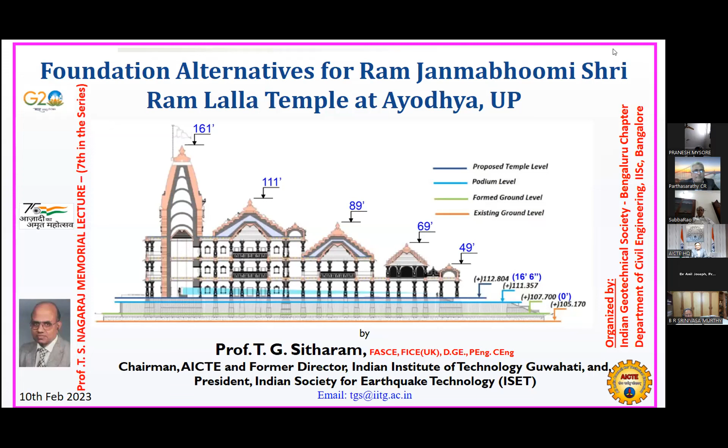I would like to acknowledge the contribution of the 8-member committee. Before I proceed with my talk, you can see many names very relevant and known to all of you. Professor Raju chaired this committee, former director of IIT Delhi, and L&T Geostructure LLP, Larsen & Toubro Limited Construction, was the contractor. CBRI and NGRI is the main agency for geotechnical and geological investigations. IIT Madras also reported on the backfill. Argon Engineers, Consulting Engineers and Architect Ahmedabad was also involved in some of the structural part.

C B Sompura, Temple Architect Ahmedabad, gave the initial concept for the temple of Sri Ram Temple at Ayodhya. Sanjars Geotechnic Private Limited, soil foundation experts from Delhi, carried out the geotechnical investigation in two phases. NGRI and many other institutions in the country have also done studies. This is the composition of the committee.

This is the committee. It had Professor Manu Santanam, Deepta Banerjee, former director of IIT Roorkee, A P Mal from Tata Consulting Engineering, Bhattacharjee from IIT Delhi, myself, Professor Gandhi, also known to all of you, former director of NIT Surat, and Professor Dr. Gopal Krishnan, former CBRI director, when I was chairman of the Research Council of CBRI - he was the director - and Professor V.S. Raju was the chairman. Thanks to all of them for their contribution.

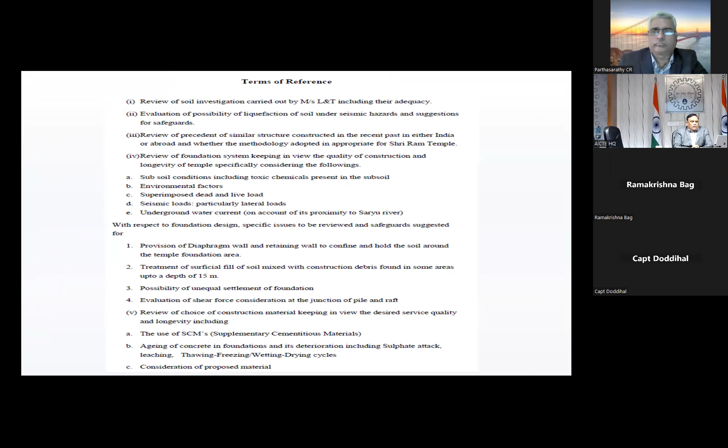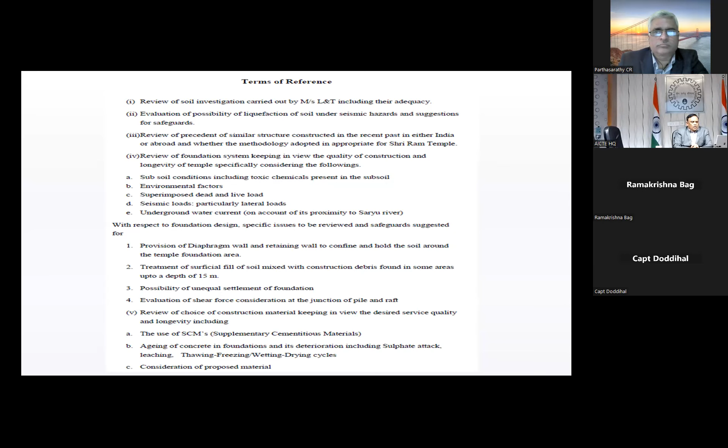The terms of reference for this committee - I will not read it all out, but you can see clearly - were to review the soil investigation carried out by M/s L&T, evaluate the possibility of liquefaction of soil under seismic hazards and suggest safeguards, review precedents of similar structures constructed recently in India or abroad, review foundation systems, subsoil conditions, environmental factors, superimposed dead and live loads, and underground water current, since it's very close to the Sarayu River or Ghaghara River in Ayodhya.

With respect to the foundation, specific questions were asked to the committee: whether there is a need for a diaphragm wall or retaining wall to confine the entire area and hold the soil around the temple foundation; treatment of surficial fill of soil mixed with construction debris found in some areas up to a depth of 15 meters; possibility of unequal settlement of foundations; evaluation of shear force consideration at the junction of the pile and raft; and review of choice of construction material keeping in view desired service quality and longevity, including the use of SCMs (supplementary cementitious materials), aging of concrete, and consideration of proposed material.

From this, it's very clear this was a very comprehensive committee which looked at many things. In my talk, I'm not going to get into all the details, might touch some, but not all. I'm going to only focus on the foundation alternatives, what alternatives were suggested, what was my contribution, and why I was a little different than others in that.

I would like to highlight that when this committee was formed and this terms of reference was given, L&T had already put the big drill rigs for piling. They had drilled 4 piles up to almost 18 to 20 meter depth, 1 meter diameter, without any reinforcement. They tested both vertical and horizontal pile load tests at the site, slightly adjacent, 10-15 meters from the Garbhagriha. This is the background. After that, this committee was formed.

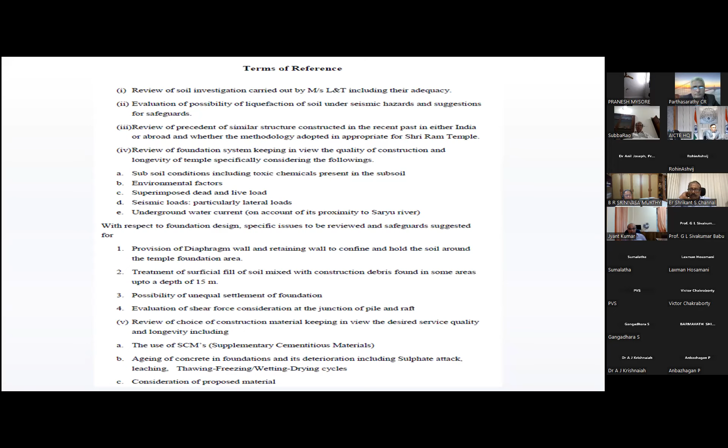So let me give you the project brief now. Next slide please. This is the Sri Ram temple at Sri Ram Janmabhoomi complex at Ayodhya.

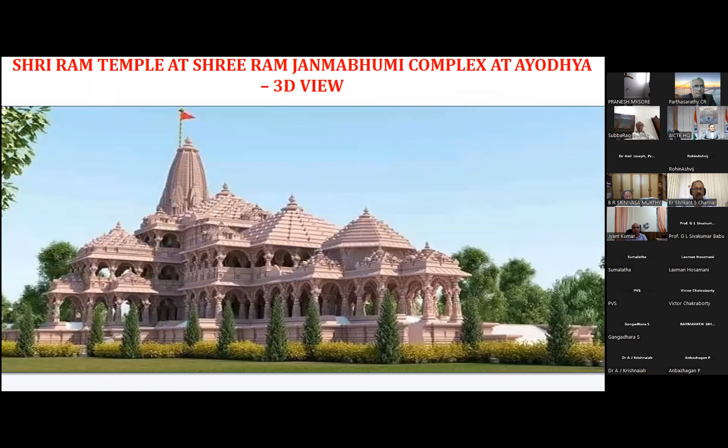It is completely constructed. This is what it looks like, and a 3D view of the same can be visible. This is the 3D view of the temple. I'm only talking about the temple, Ram temple, not the entire complex.

Please understand, this is about 70 acres, 67 acres precisely initially, but today it has even increased to 100 acres of land. So I'm not going to talk about the entire area of how the Ram temple complex will be built. I'm only focusing on the temple foundation. This temple is what you are seeing in the picture.

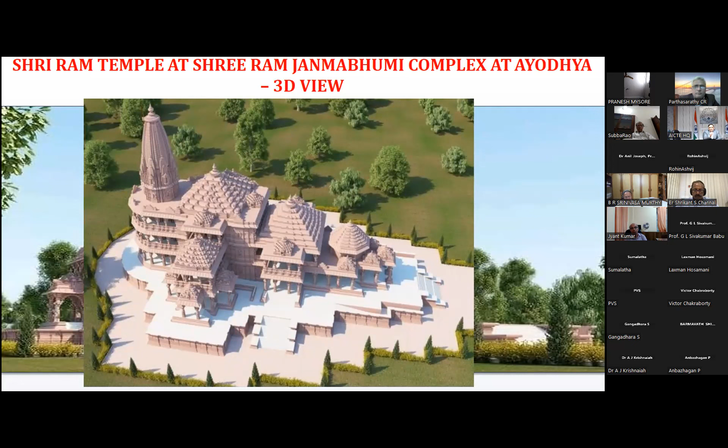So the project location, next slide please. The project location, you can very clearly see, is about 140 kilometers from the city of Lucknow.

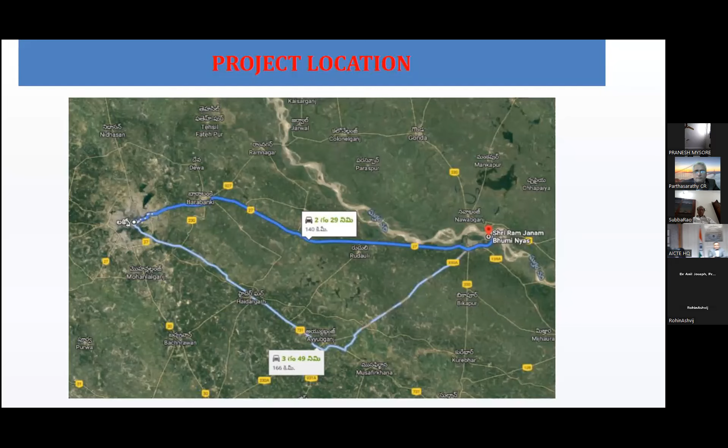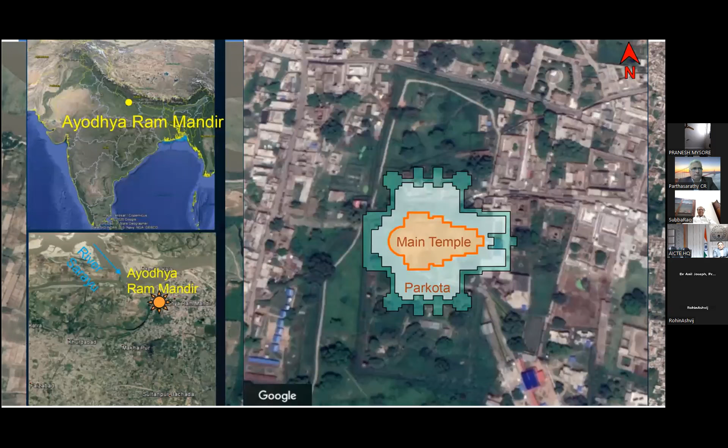Next slide please. This is the location of the main temple. For those who want to see where Ayodhya itself is in the Indian location, you can see it in this picture.

Next slide please. This is what I want you to closely observe, the exact location. If you see the bottom part of the cross section, you can see that square box in green is the temple foundation, the probable foundation of the temple. You can see the cross section along the x-axis, and very clearly the temple is actually on a mound, on a sort of mountain. The next cross section also shows the same thing in the perpendicular direction. So you can clearly see the distance from the river is hardly about a kilometer, but the temple is located on a mound, on a sort of mountain at that location. Even immediately next to the temple foundation, about 15-20 or 30 meters away, the gradient changes drastically, as you can see in this diagram.

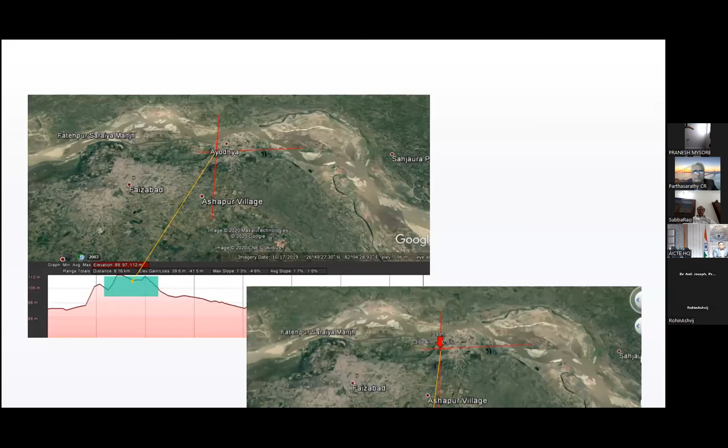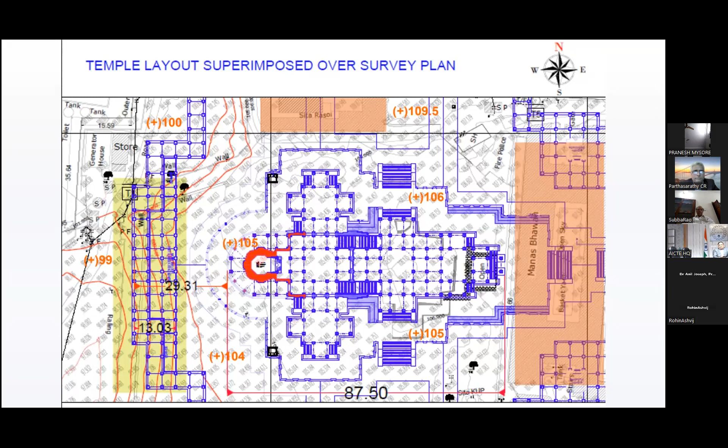Next slide please. You can see the contours here and the temple foundation very clearly marked. I will talk about the temple foundation levels in the next slide too. About 105 is the ground level. On the eastern side and western side, there is almost a 6 meter drop, going to 99 meters. On the other side, it increases by about 4 meters or 3 meters in the northern or northeastern side. And it is fairly flat in the southeastern side.

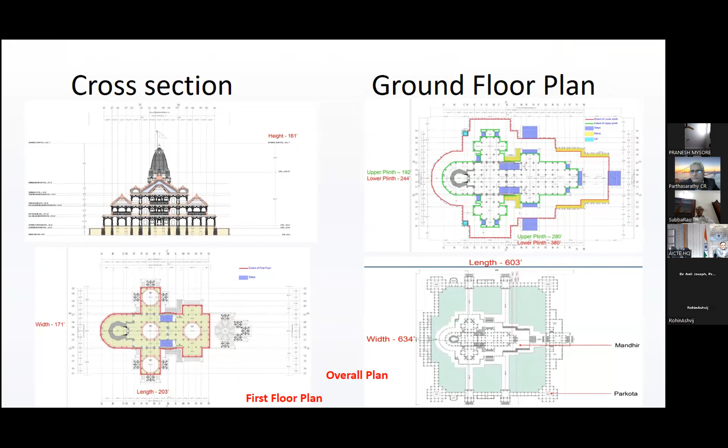So you can see the total width of the temple. It's about 116 meters in length and 74 meters in width. This is the main temple, and the parikrama is outside. The total dimension is 182 meters by 181 meters for the entire temple.

Next slide, please. Now the typical cross section of the temple. You can see the bottom part, and the center where the Garbhagriha is located has a tower 161 feet tall.

Also please note, 105 meters is the ground level, but the made-up level is at the podium level, which we call 111 meters. The proposed temple level is at 112 meters, about 7 meters above the existing ground level. But the formed ground level is something like 107 meters, meaning the temple level is 5 meters above the formed ground level. So there are a lot of steps to climb on both sides as well as the front.

Next slide, please. Before that, go back one slide. So you can also see the 3 levels: 161 feet, 111 feet, 89 feet, 69 feet, 49 feet. The gopuras for different sections of the temple also vary.

I will not get into the structural details, but the total temple design is very important for deciding the type of foundation. The pillar connections have no steel at all used in the temple construction. The pillars, beams, and columns are almost ready-made and simply assembled at the site. You can clearly see copper clamps used for the slab connection and beam connection. For the pillar connections, they are basically grooved into the base parts of the pillars.

Very clearly you can see cross section A and cross section B, with details given here. If some of you are interested, I will share the presentation after my talk so you can take a closer look. Next slide, please.

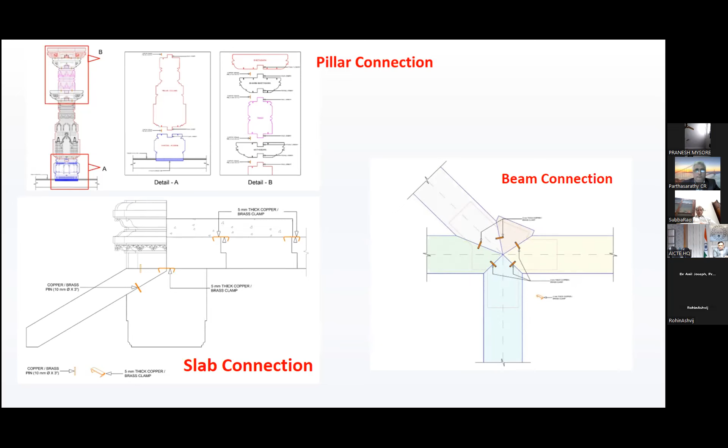The contractor is L&T Geostructure, a unique legal business entity who are experts in building foundations by focusing, capturing, and building business in the ground engineering segment. You can clearly see that even the contractor selection reflects a geotechnical structure focus, because the superstructure is almost like assembly.

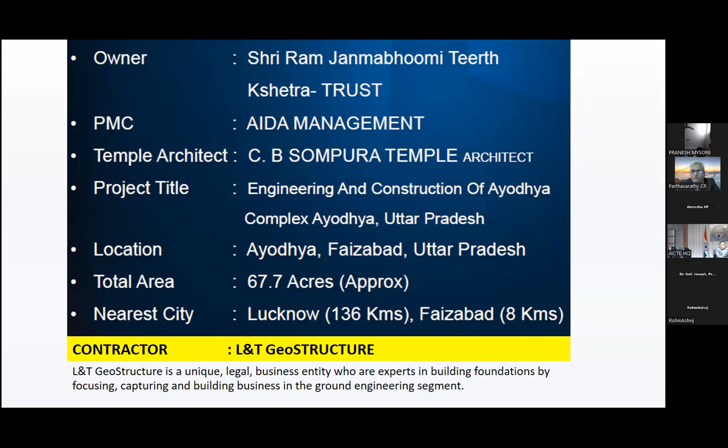So next slide, please. This is the geotechnical investigations, investigation of the foundation system.

Next slide, please. I don't need you to read this executive summary, but I put it so you can understand how this geotechnical report was prepared, whether regarding groundwater or surficial fill. What I'd like to highlight is a surficial fill about 5 to 17 meters, from an RL of 98.9 meters to 90.1 meter depth from existing ground level, consisting of soil mixed with construction debris. SPT N values varied anywhere from 3 to 15, with some higher values in filled-up soils.

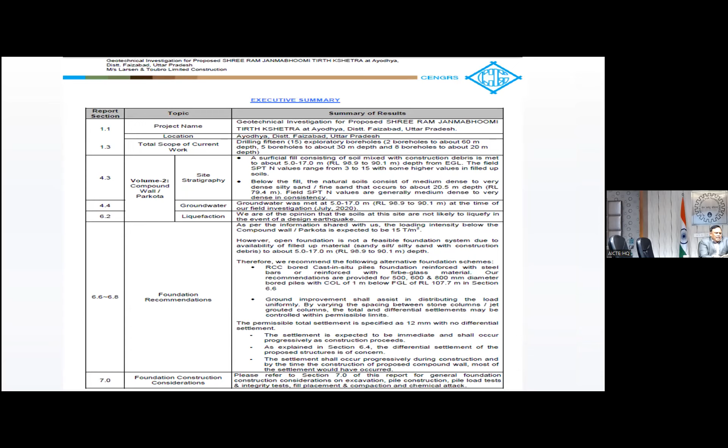In total, 15 exploratory boreholes were drilled: 2 boreholes to about 60 meter depth, 5 boreholes to about 30 meter depth, and 8 boreholes to about 20 meter depth. A second level of geotechnical investigation was also carried out at the site. Based on the SPT values, generally medium dense to very dense consistency has been described in the report.

Groundwater was met somewhere between 5 meters to 17 meters, RL of 98.9 to 90.1 meters, varying across the site location. According to the geotechnical report, liquefaction is unlikely - the soils at this site are not expected to liquefy in the event of a design earthquake.

But this question was again posed to the expert committee. However, the foundation recommendations from the geotechnical report were RCC bored cast-in-situ piles, foundation reinforced with steel bars or reinforced with fiberglass material - all kinds of options were given in the geotechnical report.

Ground improvement shall assist in distributing the load uniformly by varying the spacing between the stone columns. The stone columns were also thought of as jet grouted columns, considering total and differential settlements. Interestingly, the permissible total settlement is specified as 12 millimeters with no differential settlement, meaning differential settlement of 0 millimeters.

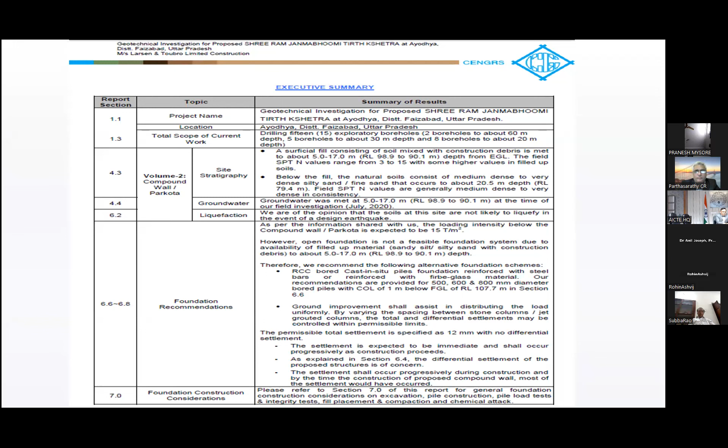These are the borehole locations and pile load test locations. You can see the vertical pile load test was conducted. As I told you, this is not chronological, because these tests were done before the committee was formed - vertical pile load test and lateral pile load test. There are four of them: LTP, VTP. You can see in the figure on the right, LTP1, LTP, VTP, VTP2 - VTP refers to vertical pile load test, LTP refers to lateral pile load test. So 4 piles were cast and tested before even the committee got into the site.

But the other boreholes you are seeing in the temple area were asked to be drilled later by the committee, and these were also done by CENGRS Geotechnical itself. There were also some trial pits at the site.

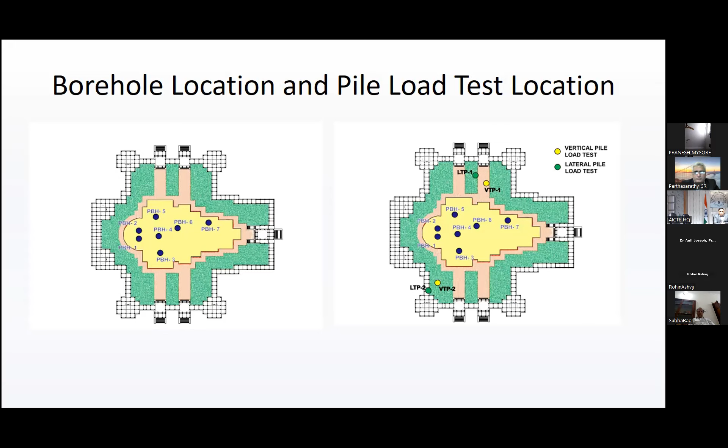Next slide, please. These very clearly indicate, from the trial pits and soil type at the location, that the soil is - at least in some of these boreholes - we did not see any artifacts or anything, at least when I visited it.

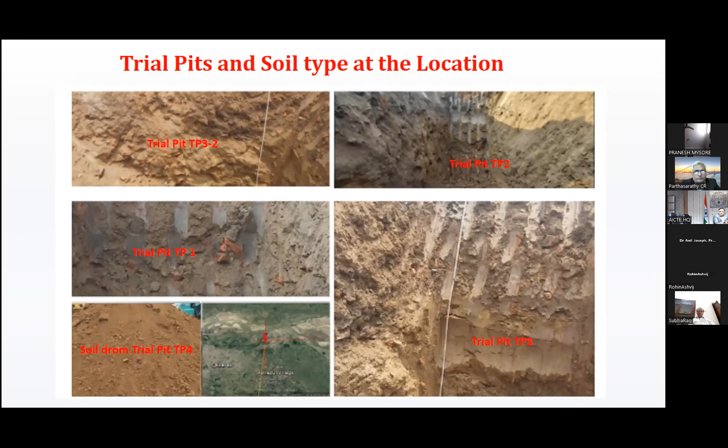So these are the locations. Next slide please - these are the locations of the trial pits: TP1, TP2, TP3, TP4.

Next, please. These are the bore logs of the 7 boreholes at the site, and you can very clearly see that 0 to about 7 or 8 meters is fill. In some locations it went up to 11 meters - for example, in the second one in the right box, there is a soil fill of about 11 to 12 meters.

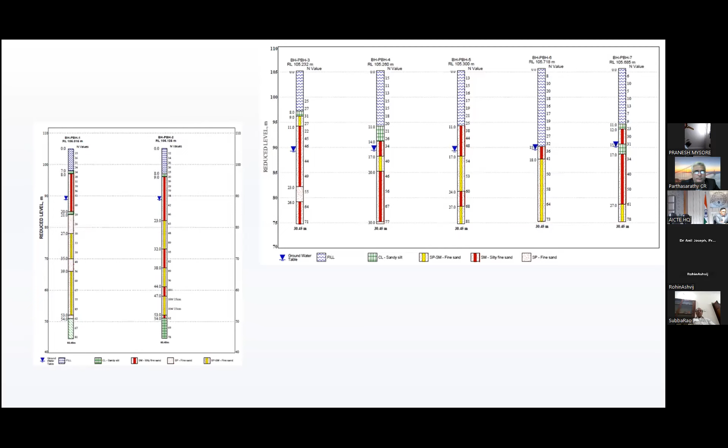Next slide please. The existing ground level is marked there at 105.17, and these are some of the other boreholes. You can clearly track near the compound wall, near the Hanumanji temple, and close to the Sitaji Mandir, where the boreholes show the variation of the fill, shown in blue. We can clearly see the depths go up to about 12 meters in some cases, and in one case more than 12 meters. Otherwise maximum 12 meters, but average something like 7.5 meters from the existing ground level - you got reasonably good material.

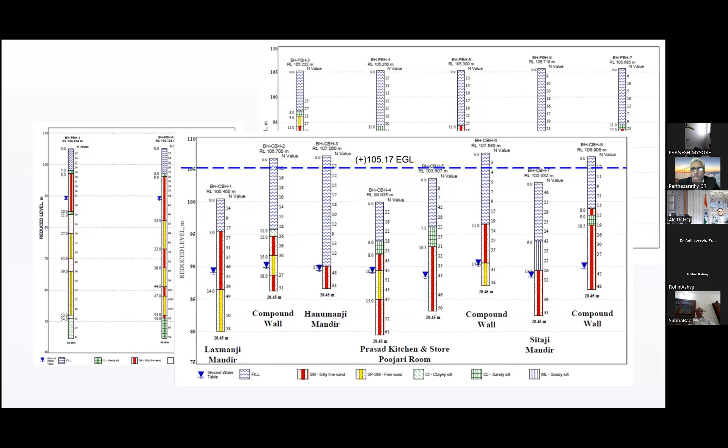Ayodhya and the temple site are located on elevated ground - this is what I want you to remember - beyond the active floodplain.

So the floods are not going to touch this mound. The temple site lies adjacent to the cutoff bank of an abandoned meander of the Sarayu River. There is a natural depression of a paleo channel near the temple site. Based on this, the committee asked NGRI to do the paleo channel analysis for this site.

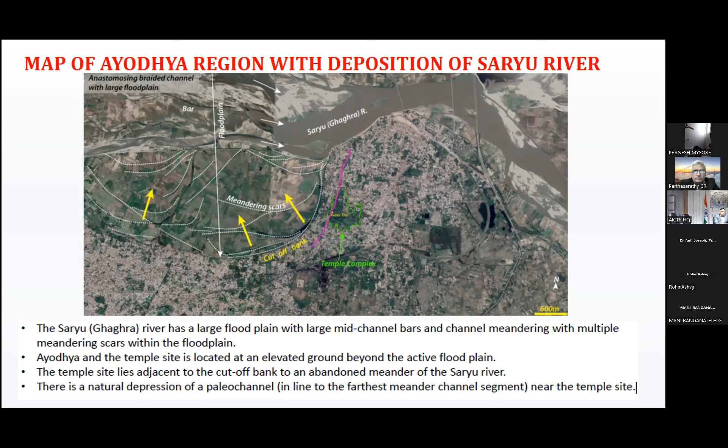This is the multi-channel analysis in the north-south profile of the temple area. We have shown the profile parallel to P6, parallel to profile 2/6, and also parallel to profile 4. So, the earthquake hazard studies, next slide please.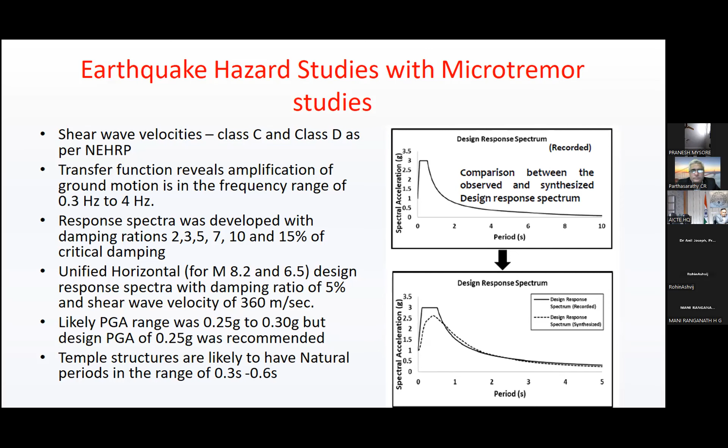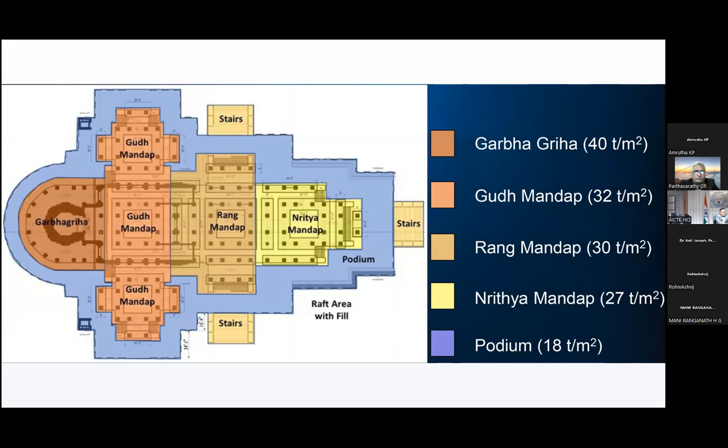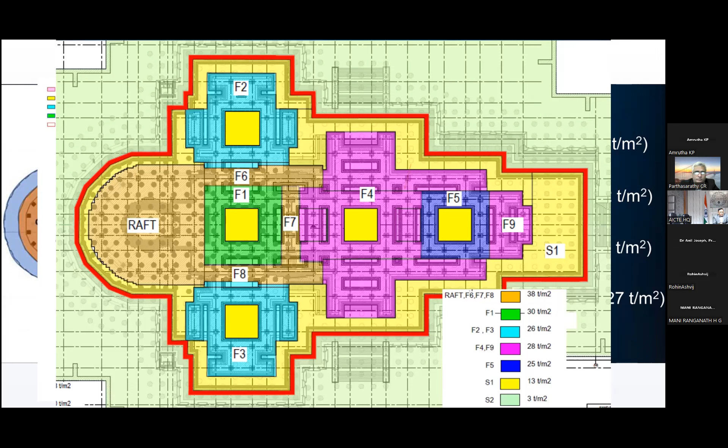The blue one is 26 ton per meter square, and the pink one is about 28 ton per meter square. The blue one is 25 ton per meter square, and S1 and S2, which you can see on the outside to the right side, are about 13 ton per meter square, and the complete outside green is 3 ton per meter square.

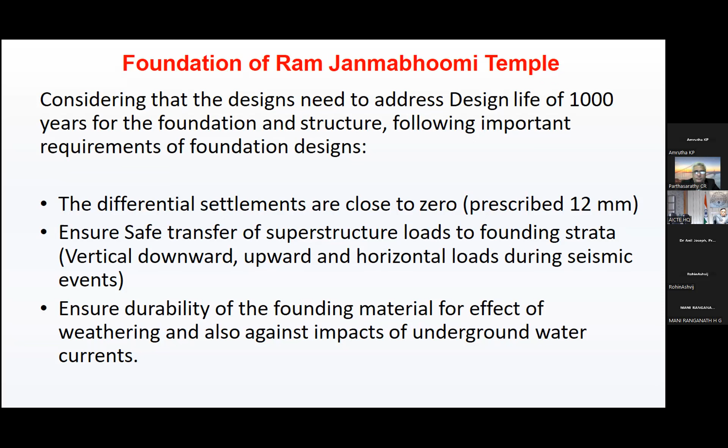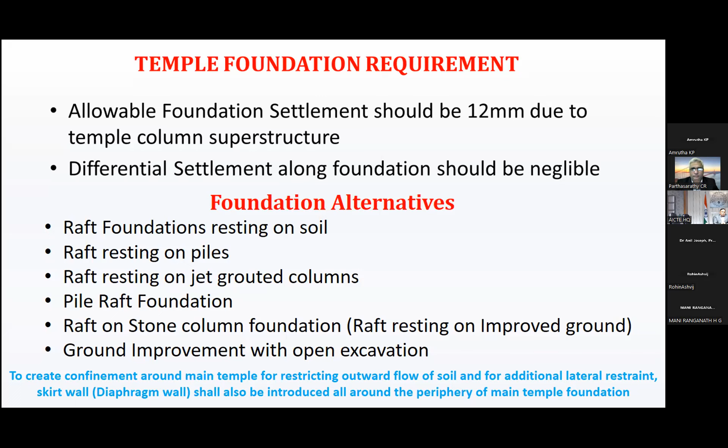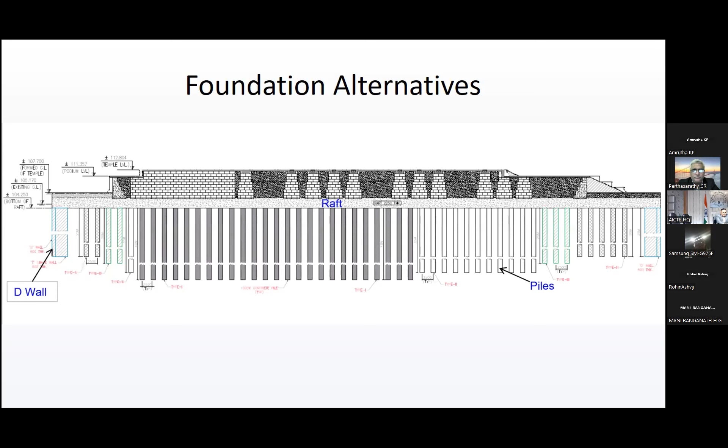Just to show you in a three-dimensional way how it was - diaphragm wall and piles in the raft. You can clearly see the pile spacing and other things were varied, and a lot of analysis was done by L&T and Tata Consulting Engineers and many others involved in the project, before even the committee got into it. They looked at this, and the problem was the total settlement was coming out too high.

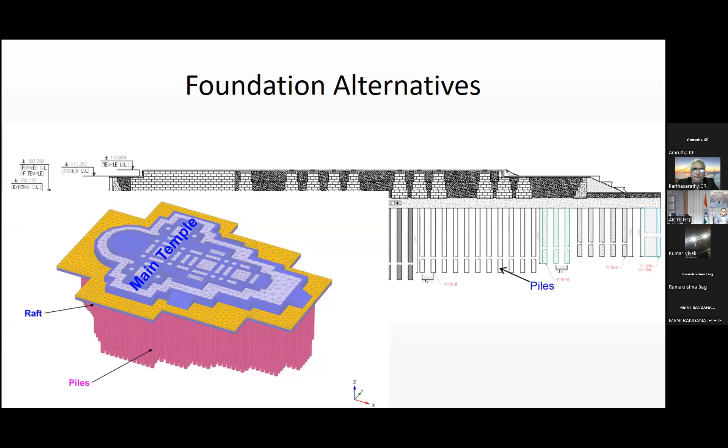It was about 144 millimeters with all these alternatives - stone columns, raft, or pile foundation. There were several analyses; I'm not going into the details of these, but it was a large settlement - not 12 millimeters.

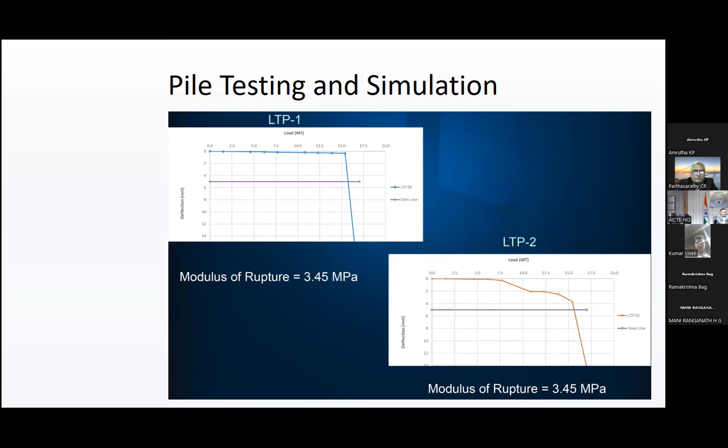So this is the lateral load diagram. Next slide, please. Yeah, this is the vertical load piles.

So again, I'm showing you the locations of the vertical pile load test and the lateral pile load test in plan. There are 4 of them: LTP1, VTP1 at the top, and in the southern part, LTP2 and VTP2.

So the committee also looked at excavation, and if it has to be done, how the excavation will look like, and if it has to be excavated up to whether it is 7 meter or 12 meter or 15 meter. There was a lot of debate on that.

So this is if it is an open excavation, this is the way we have to step the excavation for the entire area, and the three-dimensional view is shown on the right side to you. On the left side is shown the cross section.

You can see the slopes of 1 and 2 were adopted, with a berm at every increment. This is the excavation layout for 12 meter deep excavation. But many alternatives were also worked out, for 7 meter, 8, and then maybe about 14 meters also. This is the 12 meter deep excavation cross section, open excavation. So if it has to be open excavation, this was the worry.

What do we do with the entire fill, because it was considered a loose fill and not in a position to reuse, since whatever information we had was only through boreholes. We had information on the type of soil from boreholes, but the trial pits were very, very shallow, very close to the ground. So we didn't have very clear information about what is there below, whether it is dead bodies, or some artifacts, or some wells. Wells were indicated in 1 or 2, 3 locations, as I showed you in the GPR and MASW, but only one well was actually physically seen by the team, where some brick lining was found.

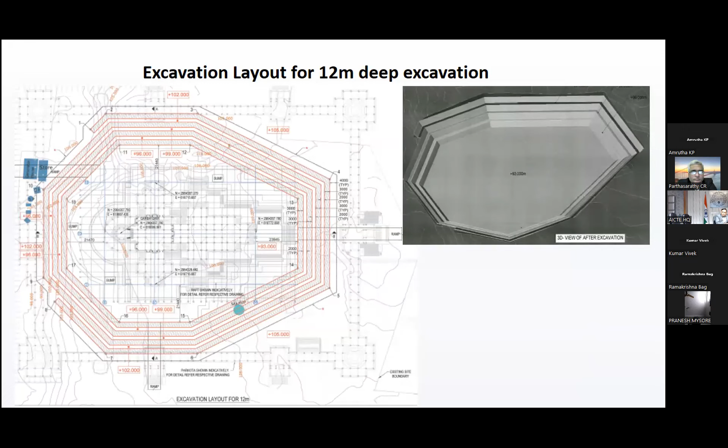So we can very clearly see how the excavation would happen, and if the soil has to be disposed of, where we should dispose it. It's a large quantity of soil, 12 meter depth.

So these are all some of the questions. The entire area had luckily 67 acres. Even if you put the entire volume of soil excavated, it would be enough to fill up the area maybe not even 300 or 400 millimeter for the 67 acres. If you remove the soil and refill with some other new material, or, as I was of the opinion initially, the same soil, if uniform, could be utilized by recompacting it to maybe modified Proctor density -- that was my gut feeling. But anyway, I will tell you my story a little in the next slides.

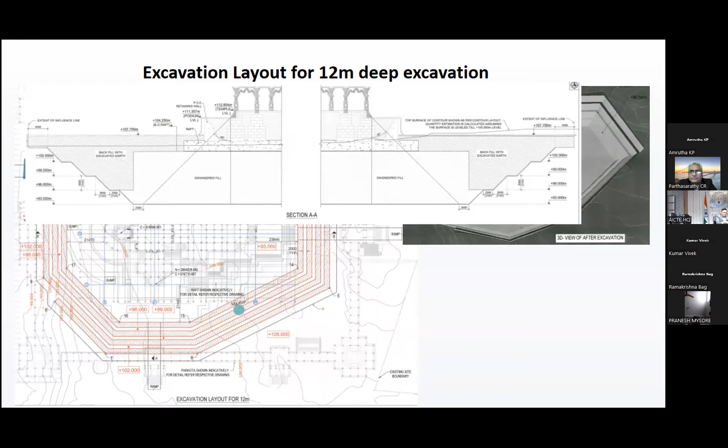So it is much more than that for the temporary construction when there is no groundwater table. So why I said this, this is very important to understand.

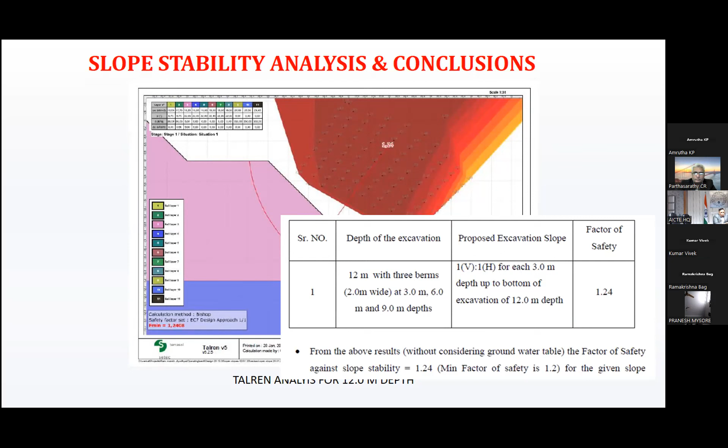Whatever I'm showing you is not in order of how the discussion took place, but I'll just show you pictures and then tell my story. Open excavations were started, as you can see here.

How this was decided, I will tell you in a couple of slides, why the open excavation site was prepared and preferred for foundation preparation. You can see the exposed piles that were tested at the site, standing tall. And you can see how the excavation continued, creating berms and a slope of 1 vertical to 1 horizontal.

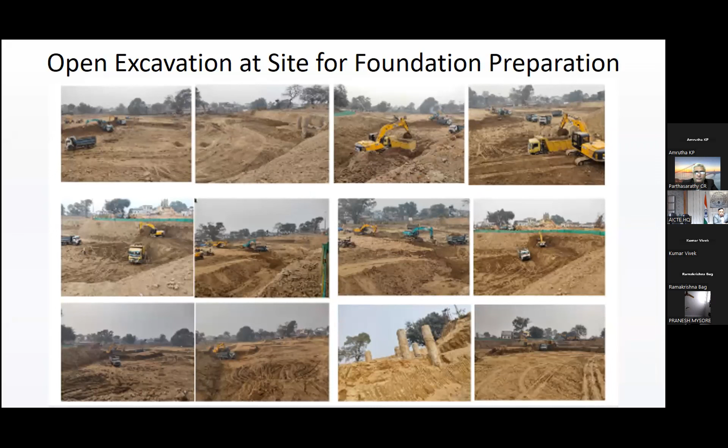This is where I would like to tell my story of ground improvement versus hybrid foundation and deep foundation. The concept was justified taking into account the ground condition, structural and serviceability requirements of the buildings, and economical factors, both time and cost.

One group in the committee felt there is a need for improved ground between 7 to 15 meters depth. It's not that 7 meters is more than average and good - below that, the natural ground is reasonably good, and there isn't much water table effect there. And the raft would anyway be at the level decided, 105 meters.

While deciding this, the committee was actually sort of divided. One group said we'll use stone columns, and another group said it should be an open foundation. I was also choosing open foundation - I was a party to open foundation.

The only reason it occurred to me was, when pile itself with concrete could not take the loads and settlements, definitely stone columns will not take that settlement. Settlements were in the range of 100 - because 100mm was done with a pile and raft kind of foundation, which is a huge settlement, not acceptable. That's why the committee was formed.

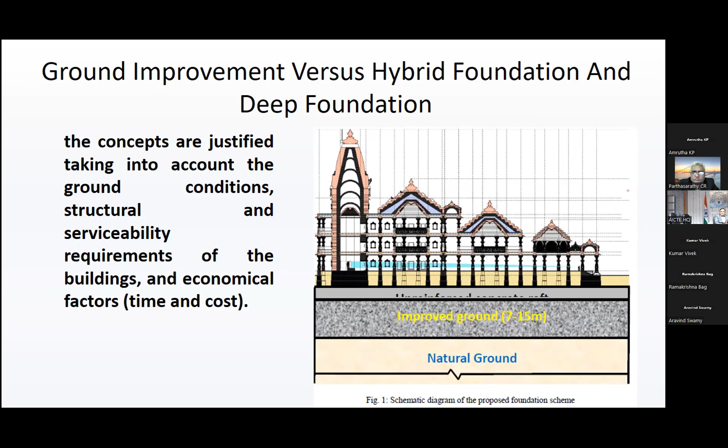So what do we fill back? Because they were thinking that this fill would not be very good, there was a lot of discussion on engineered fill, whether it should have soft rock-like characteristics. That is what Manu Santanam gave a report on from IIT Madras - engineered fill should have soft rock-like characteristics, then only it will be uniform.

Many of us sort of agreed, but I was of the opinion that making a rigid foundation is not a very good idea, because we are not going to have a machine foundation type of problem here. Somehow I was saying even using the existing soil, if it is reasonably homogeneous, removing artifacts and bricks and other things, it can be possible to recompact it to a modified Proctor.

That was my report, which I gave to the committee mentioned.

But however, there were other discussions: well graded compacted granular fill, well graded cementitious compacted granular fill, and roller compacted concrete were also discussed. And there was a study of different temples across India and also elsewhere in the world.

What is interesting, we found out none of these temples which are constructed, which survived, including Rajaraja Chola's temple, had ever adopted any deep foundations. So deep foundation or even ground improvement of the nature of stone columns or sand columns were also not adopted. Some of them, like the 1,000 pillar temple, had boxes filled with sand - box foundations were done. But otherwise, there was a detailed survey done by TCE on the different temples and type of foundations available. And it's a very interesting learning experience for us on that side as well.

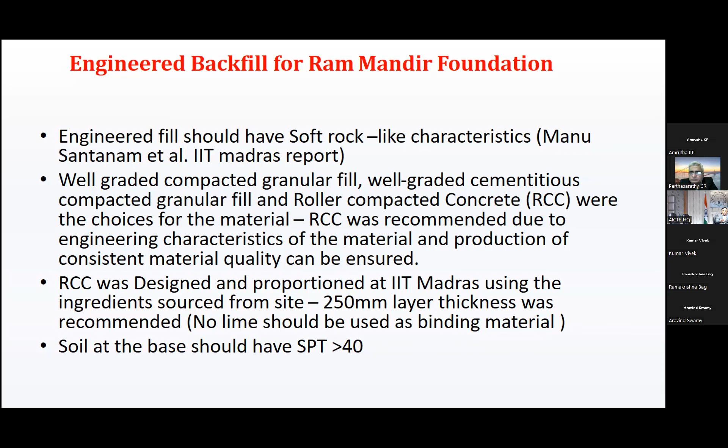So foundation alternatives suggested by the expert committee were two. Very clearly, I've just taken the recommendation from the report itself. Option one is ground improvement by vibro stone column. This was the first option, by half of the committee members, for compaction of the fill layer - vibro stone column with dry bottom feed method, which is a good option. This is a well-established technology used worldwide, including India.

This should be done for the entire footprint of the temple plus a minimum of 20 meters beyond the temple perimeter. A full-scale field trial shall be carried out, comprising large footing load tests to establish the design parameters - spacing, depth, and area replacement ratio - to achieve the required improvement.

The next option is open excavation and engineered backfill. This was also a recommendation of the committee. Please note it is not backfill with the existing soil. In this method, open excavation is carried out up to the bottom of the fill. The natural strata is well compacted with vibro rollers, dynamic compaction. It is followed by placing engineered material in layers and compacting with suitable compacting equipment.

So I am not going to read this entire thing. Well engineered, proved through full-scale field trial, and well executed - both options will meet the foundation requirement. That is the total recommendation given. It is important that both options are engineered by the EPC contractor. Their confidence to execute these options is crucial. So we also mentioned that the contractor should - luckily here, L&T Geostructure was an expert on these things.

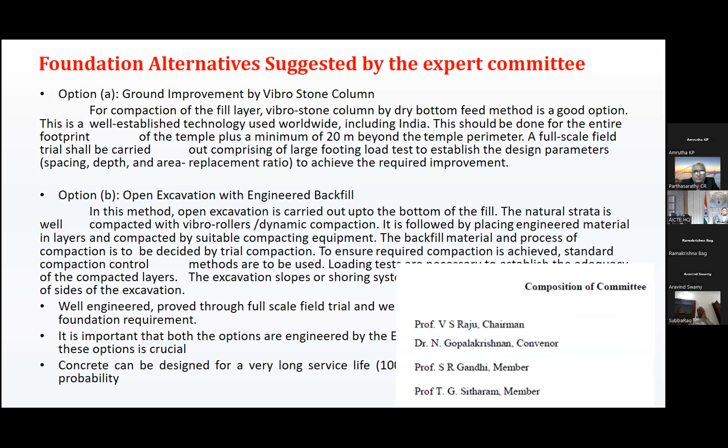So this is again reminding you of the committee composition. This is the report of the committee. It is not by me.

So on 29th December 2022, Professor Raju actually visited the Shri Ram Mandir under construction, and this is the post-open excavation and backfilling. So finally, the post-excavation is done up to 12 meters - the story is up to 12 meters they've excavated and refilled with a sort of low cement roller concrete, as recommended by IIT Madras.

So Professor Raju visited on 29th of December 2022, and he sent an email to all of us. He says the visit was truly exceptional, both technical as well as spiritual. It is remarkable the way the 12-meter deep excavation has been executed in a very short time span. The team deserves very high appreciation.

And also he goes on saying, I was apprehensive of the latter option of open excavation, mainly because of my concerns with regard to open excavation in a fill - fill behavior is not predictable. But I also have the opinion these vibro stone columns are not of good opinion either. That is why I said the settlement observation measurements showed only 4 millimeters.

When he went, the settlement observation measurements were also given to him, and he has written in his email: these measurements confirm that the foundations adopted are adequate, satisfying all safety and functional requirements. Between the two options - ground improvement by vibro stone columns and open excavation backfilling with engineered material, as I told you - the latter has been chosen.

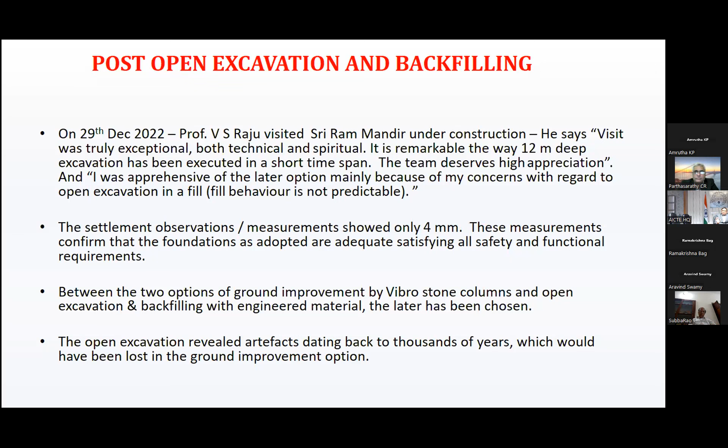Next slide, please. A very recent story of the progress of temple construction I will share, but this is my last but one slide. Rare stones reach, you have seen all this in the news media. I'll just tell you, the idols would be carved out of the Lord Ram from the two rocks which are found in the Gandaki River at a place close to Saligrama, near Muktinath, place of salvation.

Many of us at our homes keep Saligrama and perform puja for that. You remember, that is from Nepal, Mustang district. And this is one stone of that. A similar sized stone is coming for Ram and Sita and also the other statues.

The next slide shows the video. I'll just show you, it is a 30 second video.

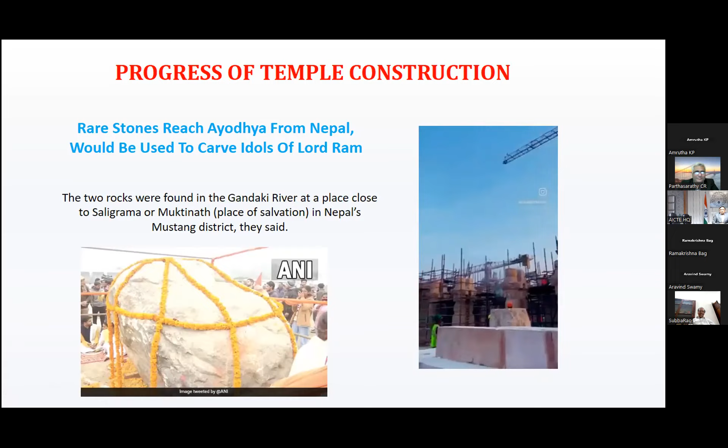Next slide, please. So the temple is in construction, and all of you have seen that it will be inaugurated in January 2024, so exactly about 11 months from now. I would like to thank everyone who has contributed, especially my teachers, including late Professor T S Nagaraj.

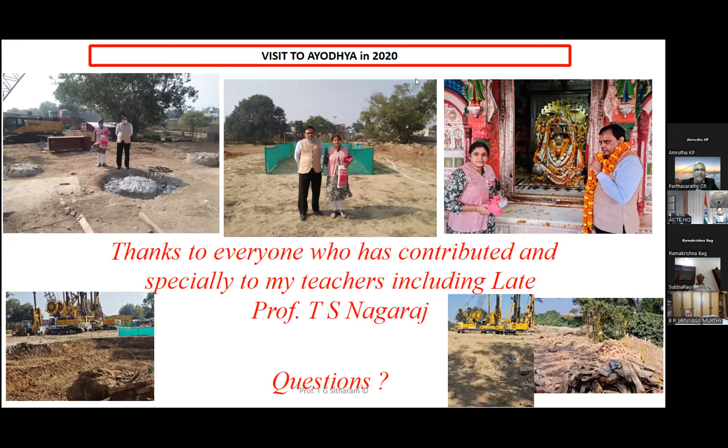Namaskar, thank you, Professor. Indeed, all of you will agree that it was a very fantastic presentation, particularly highlighting this project of national importance and the geotechnical aspects that have gone into it. We are extremely happy, and thank you, Professor, for sharing with us the technical aspects of this temple in this presentation.